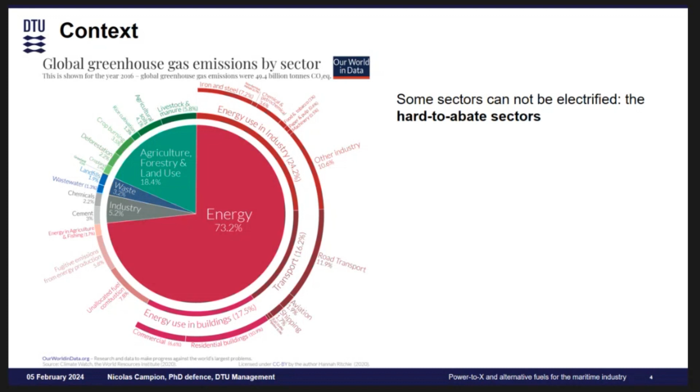So a bit of context: as you may have heard, we have some issues with global warming and climate change caused by greenhouse gas emissions, and the energy sector, as we can see in that graph, is the main emitter. There is a scientific consensus that the cheapest and most efficient way to decarbonize the energy sector is to directly electrify most of it using renewable energy. But some sectors cannot be directly electrified, and those are what we call the hard-to-abate sectors. One of them, which we're going to focus on in this PhD, is the shipping sector.

Shipping is responsible for 3% of global CO2 emissions. You could say it's not so much, but it's still as much as the African continent. And if we do nothing, while the other sectors decarbonize, shipping will keep increasing and may take up to 17% of the share by 2050. Also, shipping is interesting because, as a hard-to-abate sector, all the methods that apply for shipping can be applied to other ones, such as iron and steel, aviation, chemicals, and so on. So basically what we're doing for shipping could, with some adaptation, be replicated for a larger number of sectors.

The IMO, the International Maritime Organization, already proposed some pathways for carbon reductions: one in 2018, not very ambitious, and some in 2023 that are more ambitious. What we'll be looking at in this PhD is the area under the curve. Each scenario is associated with a carbon budget, and then we can see how far it is from what the Paris Agreement would recommend. In this presentation, I will focus mostly on the 1.5 degrees aligned target, which is more ambitious, because 1.5 degrees is clearly defined by the IPCC as a limit that we shouldn't overshoot.

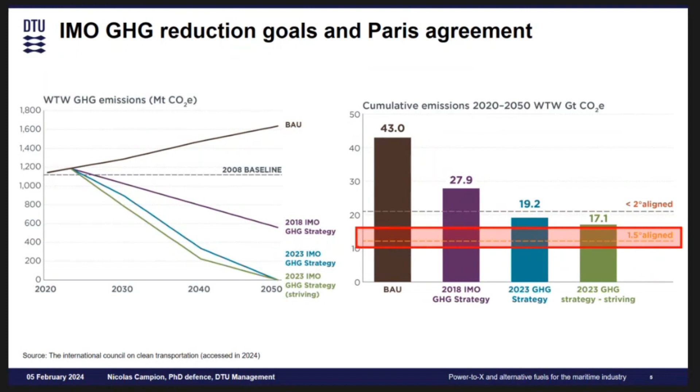And in addition, I've read in Le Monde that if the temperature keeps increasing, the wine production in Champagne will be moved from France to England, and we cannot let this happen.

So the emissions can be reduced through three different things. First, design and operational measures identified by the IMO. But as you can see here, we have a green bar that shows that without anything else, without alternative fuels, we cannot reach net zero. But this raises a lot of questions. When we have to change fuels, which fuel should we use? How much do we need? How do we produce them? At what cost? And is it enough to still stay within the Paris Agreement? So we're going to address all these questions today.

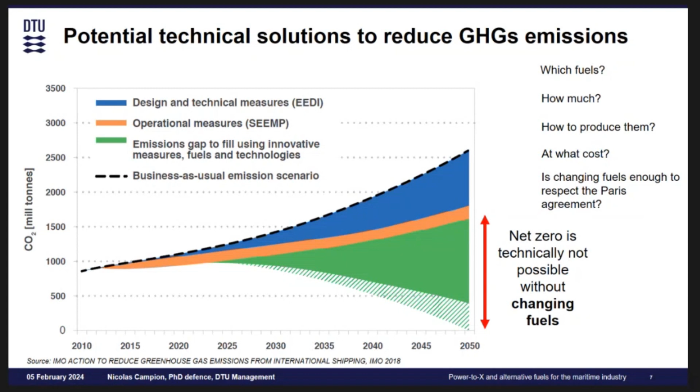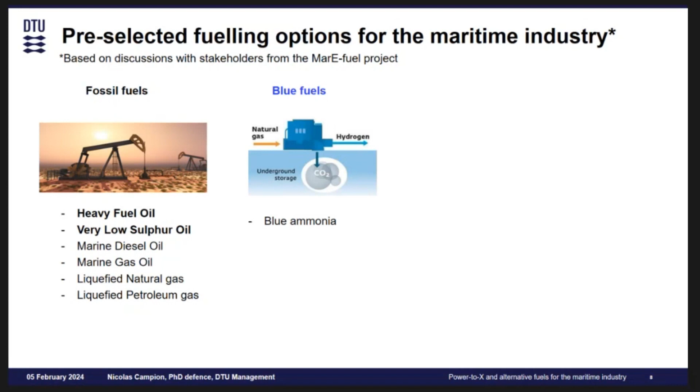So first one, which fuels? Here we're not starting from nowhere. We're looking at literature and discussions with partners from the project that financed my PhD, MarE-fuel. We select the existing fuels, so the fossil fuels, the one mostly used today being heavy fuel oil. We consider blue fuels that are produced similarly to fossil fuels, basically from natural gas, but coupled with systems that capture the CO2 emissions and put them underground forever, in theory. Then biofuels, second generation biofuels, liquefied biogas, for example. And then where most of the focus will be is what we call e-fuels and bio-e-fuels.

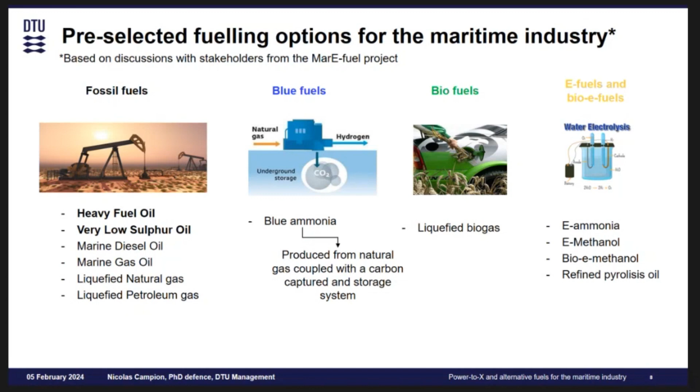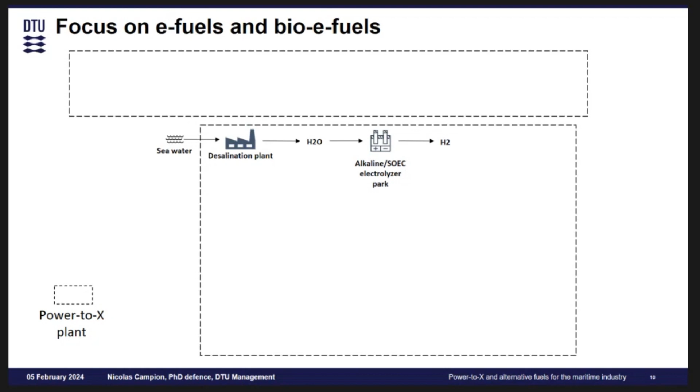These fuels are produced in what we call a power-to-X plant. So it looks like this, and I will go a bit more into detail to explain how we produce these fuels. The main component of the plant is the electrolyzer that will split water into hydrogen. We have different electrolyzer technologies that we've been looking at in this PhD. To split the water into hydrogen, you need electricity that you can source from the grid, but ideally from renewables, to have what we call green or renewable hydrogen. Once you have this hydrogen, you need to transform it into more advanced chemicals that can be used in the ship engines. So you have different ones.

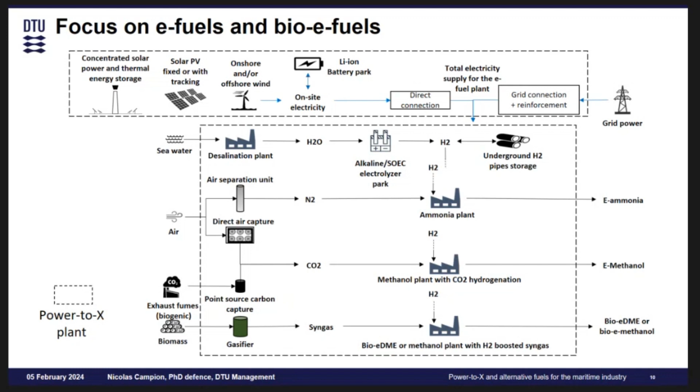The first one we look at is ammonia, which you can obtain by mixing hydrogen and nitrogen from the air. E-methanol, which you can obtain by mixing with CO2. And then finally, bio-e-methanol, which also uses biomass to produce gas that will be boosted through hydrogen. That's why we have the bio in the title. So now that's all the fuels. If you want to improve the operation of your system, you can also, for example, include underground hydrogen storage to take into account the variability of renewable power. Okay, now let's move into the research gap and questions.

So looking at literature about people doing fuel transition pathways for shipping, we can see that it clearly identifies fuel cost and fuel greenhouse gas emissions as the most important criteria for decisions. But usually these two factors are sourced from different sources in the literature and put in the same model. So this means that you will have a non-fair assumption between the different fuels. So when you compare them, it would be important to have something that gets both together with consistent assumptions.

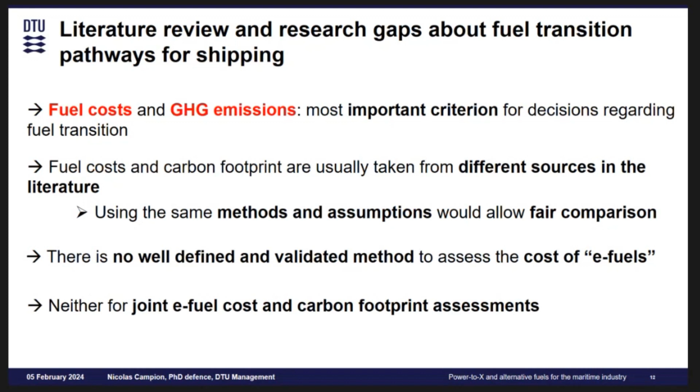In addition, there is no well-defined and validated method to assess the cost of e-fuels, and neither for joint e-fuel cost and carbon footprint assessment. So this led to our research question. So the first one that we will answer through this PhD is: what are the possible fuel transition pathways to align the maritime sector cost effectively with the Paris Agreement?

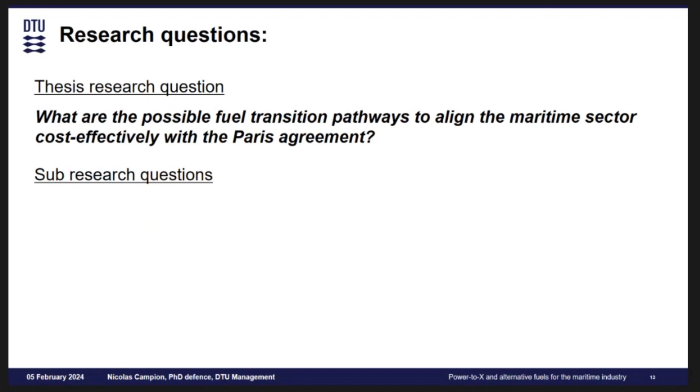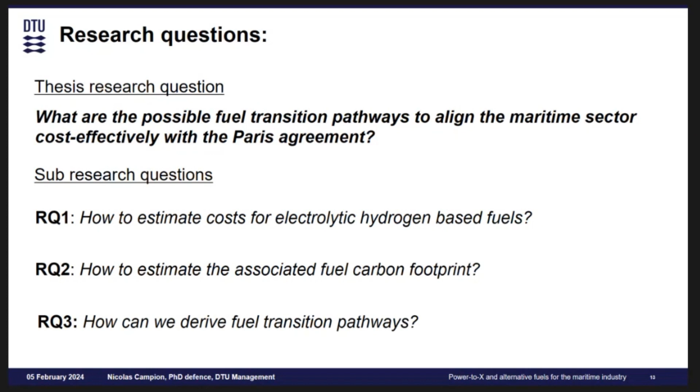And this also led to some sub-research questions, one related to the fuel cost. So how to estimate the cost for electrolytic hydrogen-based fuels? One to the emissions: how to estimate the fuel carbon footprint? And finally, how can we derive fuel transition pathways? Let's move to the method and application to answer these questions.

So our method will be divided in two main parts. So one part is on deriving fuel transition pathways. So the main research question and research question 3 have been addressed in paper number 9 and technical report number 1. And the other part of the method is about finding joint cost and carbon footprint estimates. So here we focus on hydrogen-based fuels.

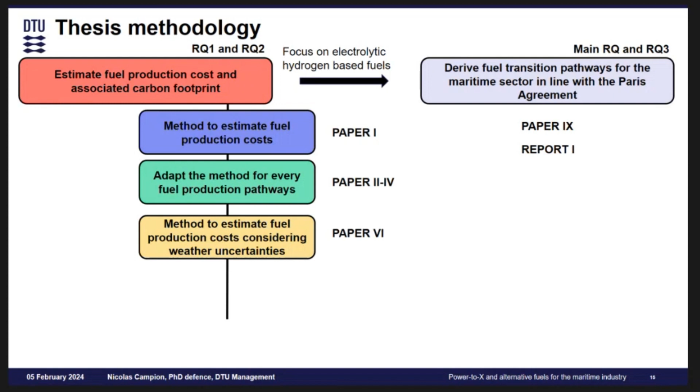So this part of the method is divided in subcategories that have a logical order. So first, we find a method to get the production cost. Then we adapt this method for every possible fuel production pathway. Then we have also an improvement of the method to include weather-related uncertainties. While we develop these two methods, we have, in parallel, developed a method to optimally size what we call a power-to-X plant. Then we have a part about the validation of the method. And finally, one where we get both cost and carbon footprint assessment.

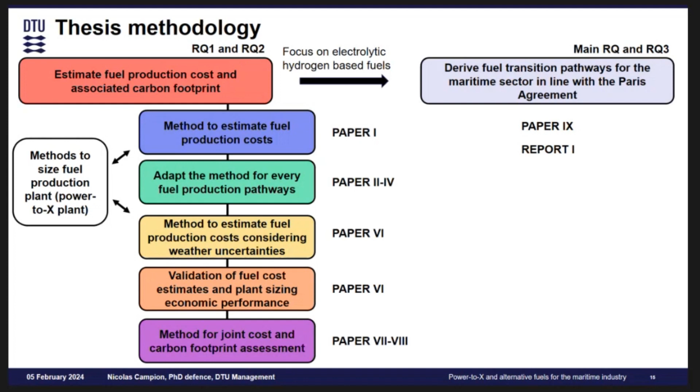So let's move to the first part. So here, I looked at the literature to see how you would traditionally estimate e-fuel cost, back in 2019. One method that you could use for an off-grid system is to basically use the LCOE, capacity factor, system efficiency, and cost to get the fuel production cost. And if you have a grid-connected system, it's more or less similar, but using an average market electricity price or sometimes a renewable LCOE to get the cost.

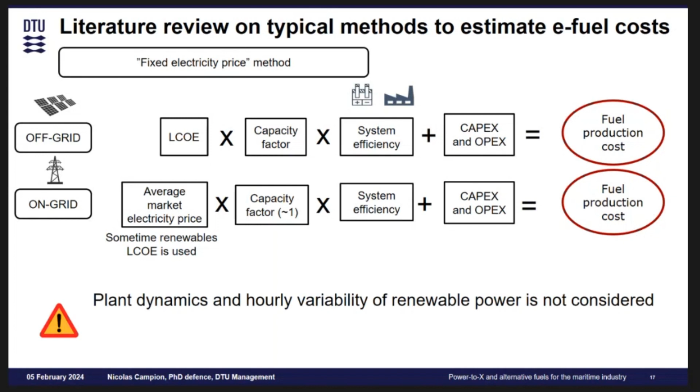What is the problem with these methods? So first of all, the plant dynamics and the hourly variability of renewable power are not considered. Second, in general, you usually only consider one renewable power source, while a combination of different ones, and also the grid, could be relevant. And finally, you don't consider that the electricity price actually varies hour per hour.

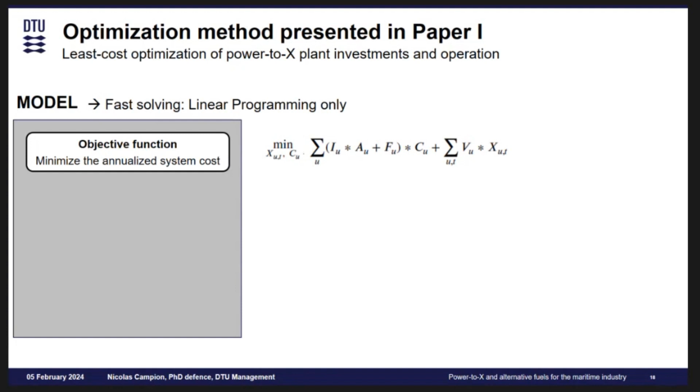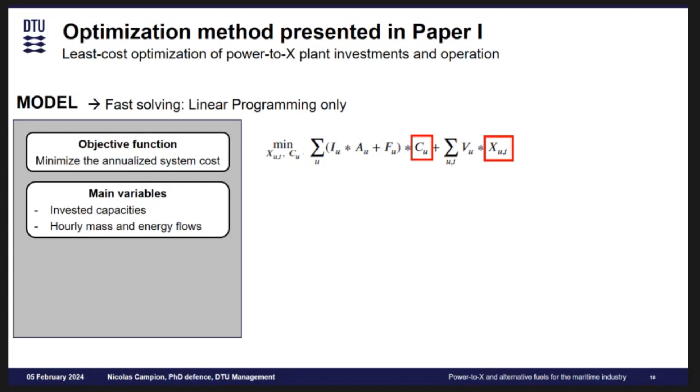So here I came up with the method and the model, which is what we call the linear programming model. It has been kept linear without including binaries to allow fast solving of the model. It has an objective function, which is to minimize the annualized system cost, split in two components, one related to the capacities installed in the system and one related to the operation of the system, like for example, buying electricity. Then we have the main variables that we take decisions on, which are the installed capacities and the hourly mass and energy flows for every component of the Power-to-X plant.

Then the model is constrained, and the main constraint that we have is, first of all, the yearly production target. That's the one that drives the model and forces it to solve. So the plant has to produce a given amount of ammonia per year, or methanol, for example. Then the minimum and maximum load for every unit. And finally, we have some mass balances that represent the chemical reactions of the different components and the behavior of storage systems. And then we have the power balances that take into account the renewable power and balance electrical production and consumption in the system.

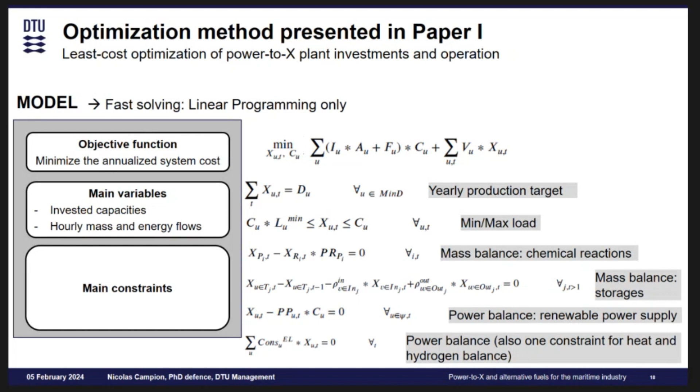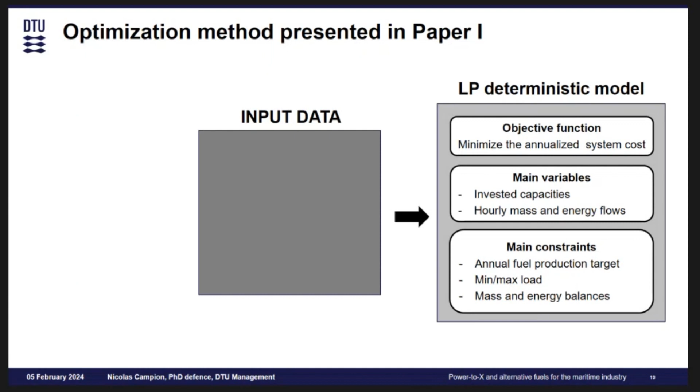So we have the model. Now we need to populate it with some data to get some meaningful results. So the ones we put in are the hourly profile data. So we have hourly power profiles from renewables, from wind and solar, for example, and also hourly grid electricity prices. Other data that we need is what we call the techno-economic data. So basically the CapEx, OpEx, and annuities for every plant component, also the efficiencies and the operational constraints.

So these can, for example, come from a process model, or from the literature in some cases. And here I would like to add that most of the data used in this thesis have been validated by industrial partners through different projects, so they are quite reliable. And once we have this, the type of result we get is the fuel production cost for a given production of ammonia per year, then the optimal system sizing, and then the optimal hourly system operation.

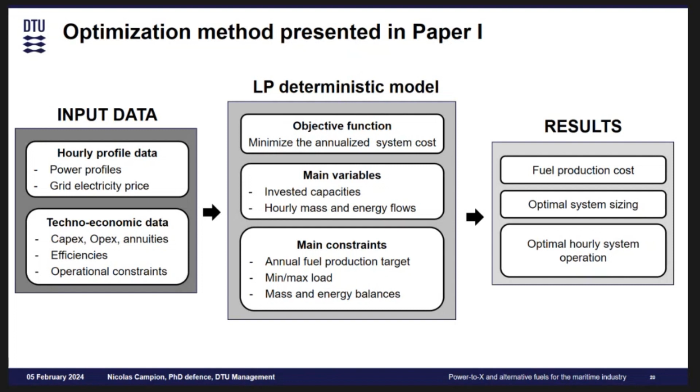So if I summarize, the advantage of this method is fast solving on a desktop computer, so less than 30 seconds. It's adapted to run multiple scenarios for different system configurations. It's scalable, so you can include many different technologies. It's free, from the language to the solver, and it's also documented thanks to David. This means that it can help to have reproducible results, which I think is a useful thing for science.

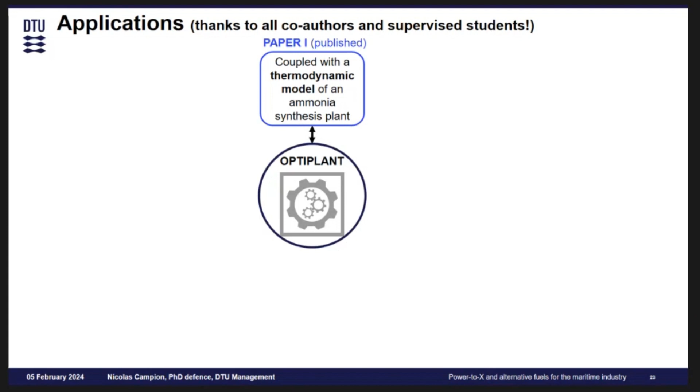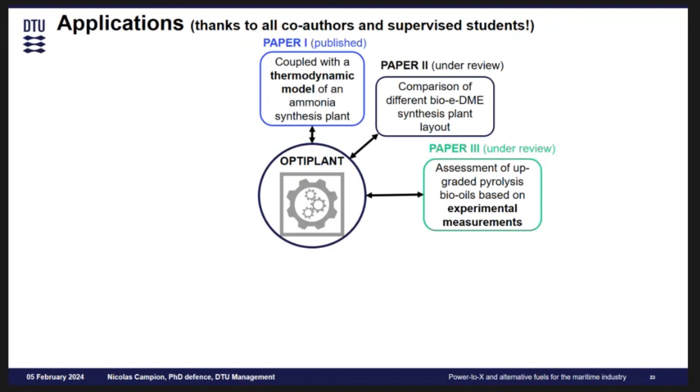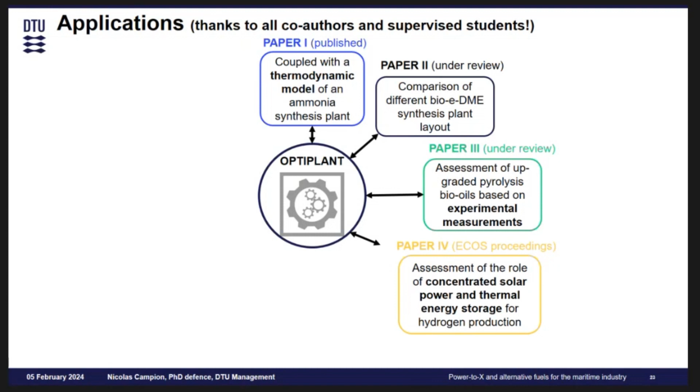And so as a proof, we used this method in very different cases. Here we have the model that can be used, for example, coupled with the ammonia thermodynamic model made by Hossein in paper 1. Also for a bio-e-DME synthesis plant model made by René. Then assessment of bio-oils based on experimental measurements made by Antoine with the help of Moritz and supervision of Lasso. Also, we can study the relevance of concentrated solar power for hydrogen production, which we did with Jose and Raul. It's also been used for different master and bachelor theses and for various projects and technical reports.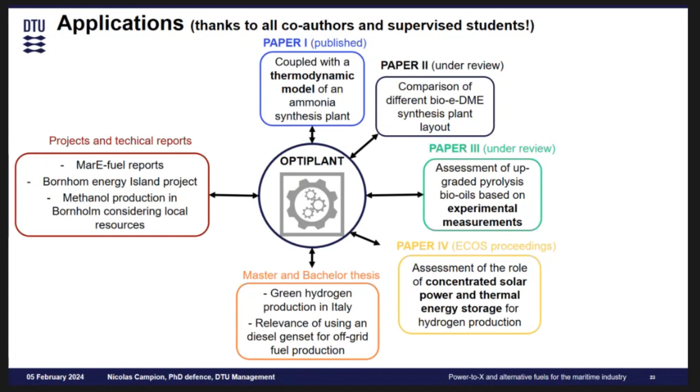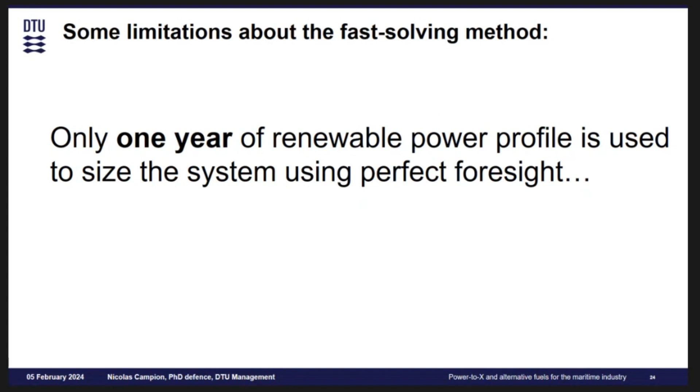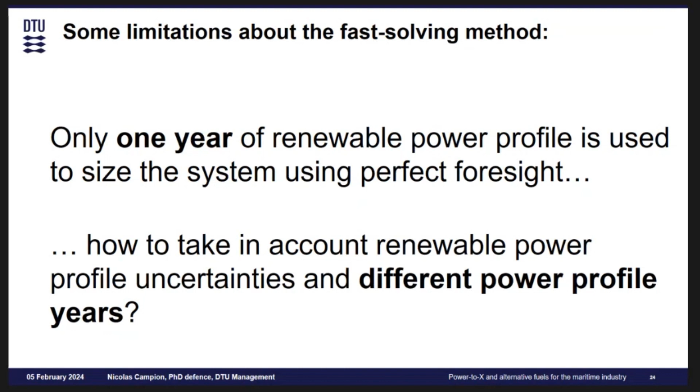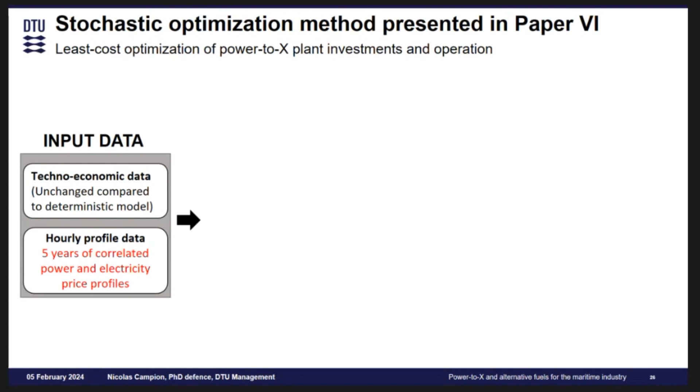Okay, but as good as it sounds, the model is not perfect. One thing that could be improved is there is only 1 year of renewable profiles that we use to get the system sizing and the costs. So how do we take into account the uncertainty related to renewable power profiles and that the weather is not the same every year? So here we move to the first method improvement, which will include uncertainties. We move from the previous model to another one that takes the same input data regarding techno-economics, but instead of taking 1 year of weather profile, uses 5 that are correlated to each other. Why not more? Because if I take more, it won't solve on a desktop computer; it becomes too big.

The core of the model is then what we call the LP two-stage stochastic model. You can see the difference in how the objective function is phrased. Basically it will minimize the system costs, not for 1 year, but for all the scenarios. So you have 2 components: the first stage decisions related to the investment, and then the operation stage decisions that are scenario dependent. The main variables are quite similar to previously. First, the capacities of the system that will be installed, and second, the hourly mass flow. But what changed here is we have an S that was not there before, meaning that the flows are optimized for every scenario.

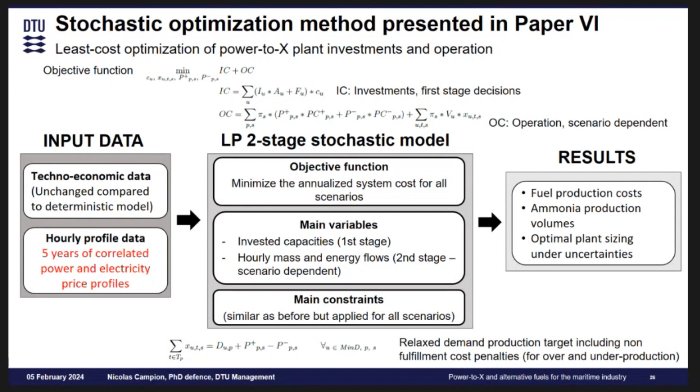Then we have the main constraints. Most of them are pretty similar to the previous model, except that they will be applied for every scenario. We also relaxed the demand production target to leave the model the possibility to overproduce or underproduce in some scenarios. This leads to two more variables, over and under production, that are reported in the objective function as an extra cost. Out of this, you get the fuel production costs, the ammonia production volume for each scenario, but also the optimal plant sizing, considering the uncertainties of your weather profiles.

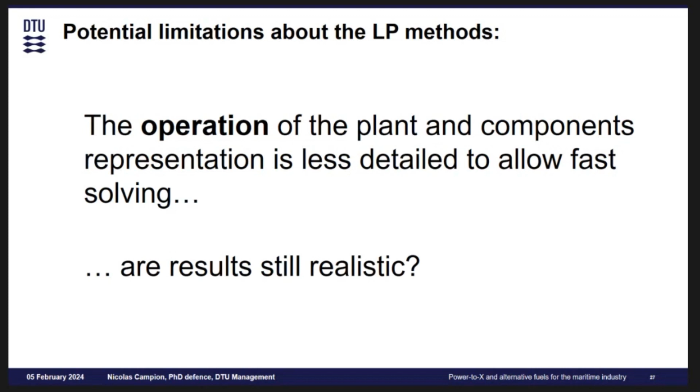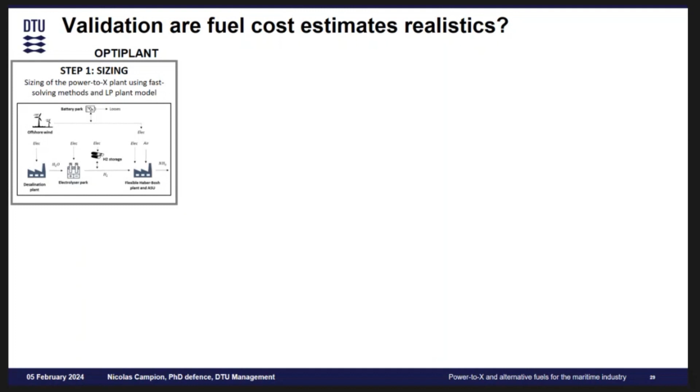Another limitation of the model, as I said before, is that to solve fast, it has to be linear. But by doing so, and by not using binaries, you have an operation that is not so detailed. So the question now is, do we still get realistic results? This is what we look at in paper 6. The method is, in the first part, we take the OptiPlant model that I've been presenting, we solve it, and we get some optimal plant sizing. Here we can use either the deterministic or the two-stage stochastic method. With this plant sizing, we call the plant builder, ask him to build it, and then try it in real conditions.

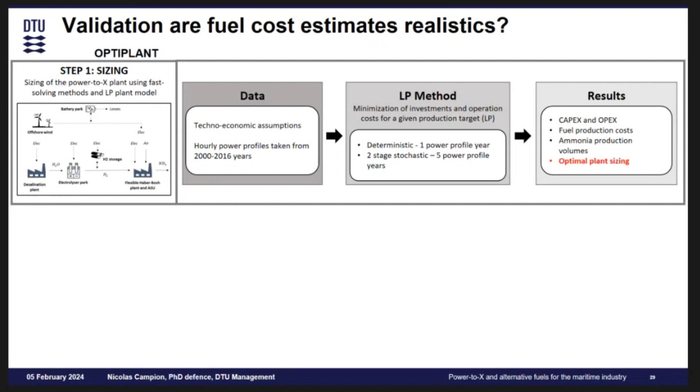Unfortunately, I didn't have any PhD budget left to build a plant. So instead, I used the model from my colleague, Ioannis, that has a better representation of the operation of the plant. It's a MILP model. We give it the sizing from the first model, and then we run the model in real conditions for 5 years. Out of this, we get the actual ammonia production volume after 5 years of operation, and what I call the observed fuel production cost, which we can then compare with the previous one to see if we were off or not.

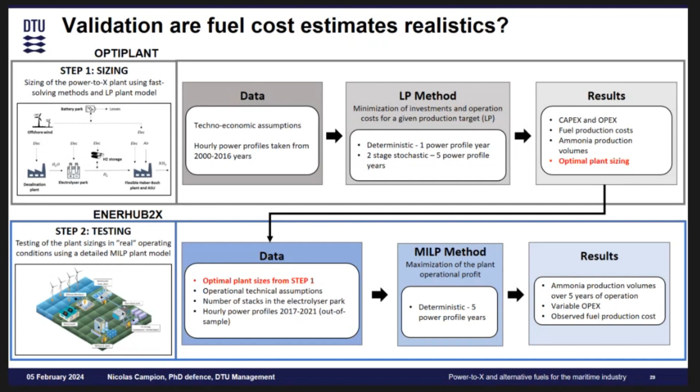Okay, now I presented the method regarding the cost. Now we'll show the one regarding cost and carbon footprint. First of all, I will introduce a few definitions about carbon accounting for shipping.

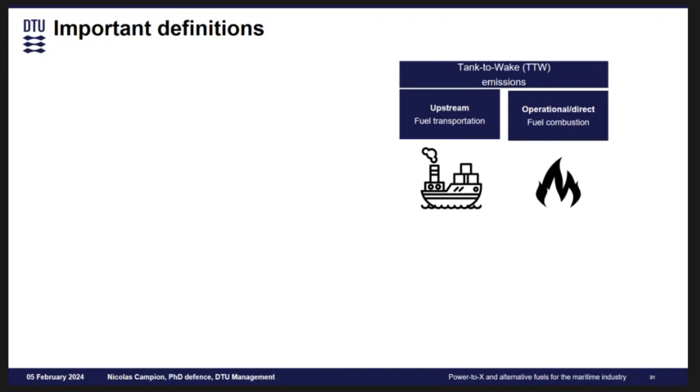So one is the tank-to-wake emissions. So it's the emission you do by burning and transporting the fuel. Then we have the well-to-tank emissions related to when you produce the fuel. So you have when you build the plant to produce the fuel, when you operate the plant, and when you discard the plant. Altogether, this is called the well-to-wake emissions.

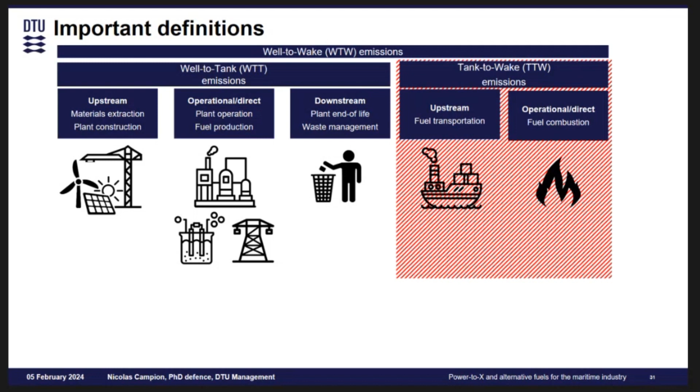In this specific time, I won't look at the tank-to-wake, but mostly at the well-to-tank, as this one will be calculated later on. So I introduce here another notion, which is what we call scope 3 emissions, that will take into account all this, what you see in the red box, and also for the electricity usage, the same. And from this, you would get the emission factor related to building the plant, and also related to using the electricity. If I want to summarize, when you use the scope 3 emission factor, you have to account for when you build the plant. So basically, the renewable electricity is not zero.

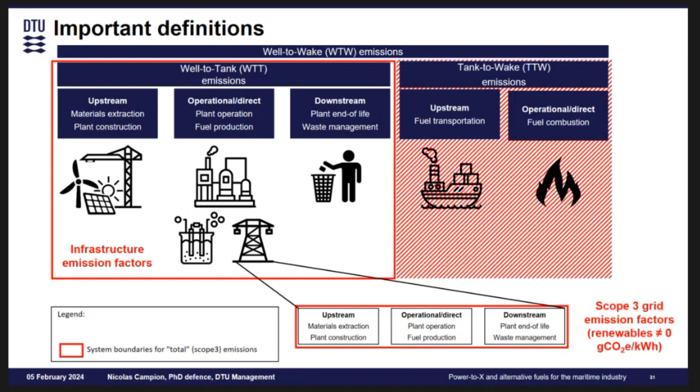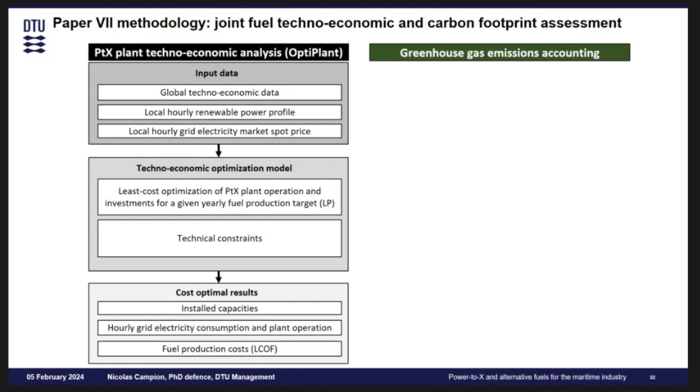Okay, now I take the OptiPlant model, so it's the same as before, and I add the greenhouse gas accounting layer. So this is done post-processing. First, we solve economically, and then we count the emissions. For that, we need the local grid mix and the emission factors for every component of the plant, and also the grid usage. Then, once you have solved the model, you have the installed capacities and hourly grid electricity consumption on an optimal setup. And from this, you can get what we call the scope 3 emissions of the e-fuel production.

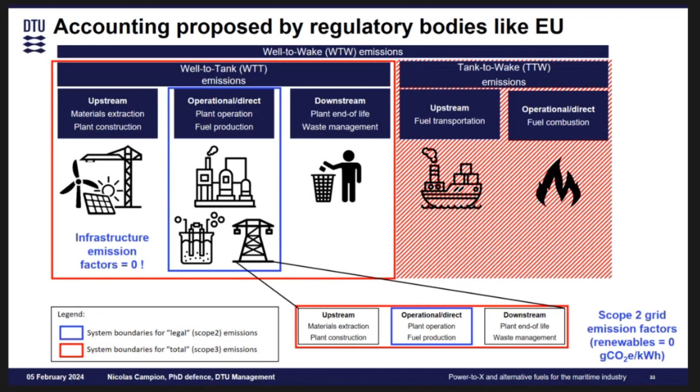So this is great, but it's not the only one. There are other ways of accounting. For example, the EU and most of the regulatory bodies just account for the operational emissions, which means that the emission factor of the infrastructure will be zero, and the scope 2 emissions will be lower for fossil and zero for renewable power. And this has an influence. It has an influence because, first of all, a regulatory body can influence the way you would do investment and plant operation. For example, you would count the emission of the grid and put some restrictions.

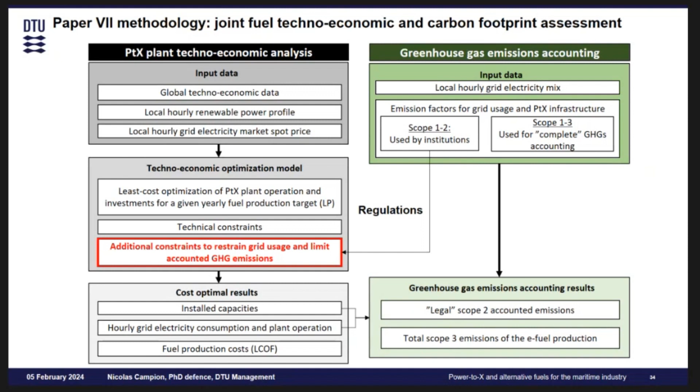So here you take the scope 2 emission factors from the EU accounting method, for example, and you use them to add some regulations that I can also include in the model as additional constraints, for example, to restrain grid usage or limit the accounted greenhouse gas emissions. And then, because we have two ways of accounting, you can get on the one hand the scope 3 emissions of e-fuel production, but also scope 2, which we could call sort of the legal ones.

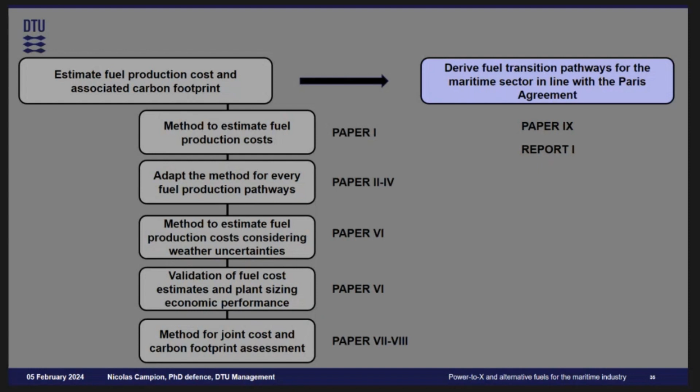Okay, now I move to the next part of the method, regarding the fuel transition pathways themselves. So we have a mixed integer linear model called SeaMaps that has as variables the number of ships that we would buy and decommission every year, the amount of fuel that we use in every ship, and then a ship stock. Then you have a driving constraint, which is the transport demand that has to be fulfilled by the shipping fleet.

Then we have different constraints related to the fuel usage. So you cannot have as much fuel as you want for your ships because they are limited by availability, for example, due to biomass resources or CO2. You will have to respect your carbon budget aligned with 1.5 degrees. And you cannot produce as many new ships or new fuel every year because there will be some ramping constraints.

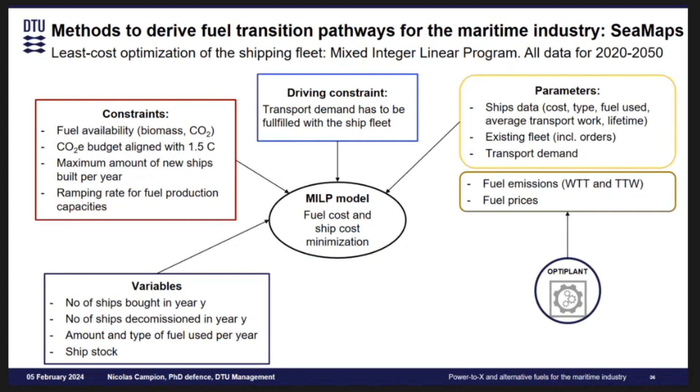Then what feeds into the model are different parameters related to the shipping fleet: cost, the type of fuel that you can use in every engine, lifetime. We also model the existing fleet, including orders, and the transport demand. And very important, also the fuel emissions for every fuel and the fuel prices taken from the OptiPlant models that have been presented.

Now let's move on to some results. So I will organize the results section following the different research questions. So one related to the cost, one to the emissions, and one to the fuel transition pathways. So let's move to the first one.

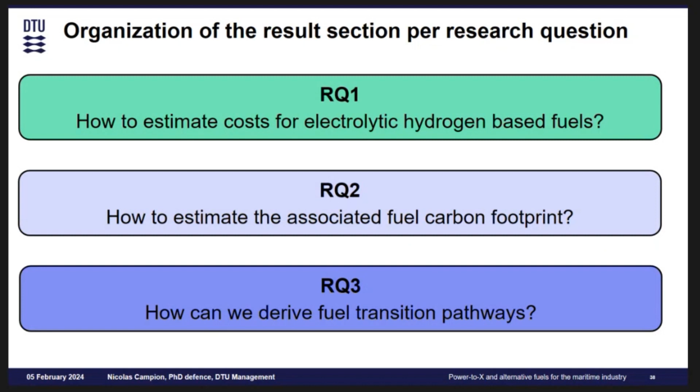So just to explain how we got the results, we've been looking at 3 different sites in the world where you could produce fuels. So one is in the north of Chile, where you have a lot of solar, but not much wind. The other place is a place with a bit more hostile conditions, with no sun but a lot of wind. So this is Denmark. And then the last one is in Australia, where you have both sun and wind.

Then what do you get? So here we have a graph where I show on the dots the fuel production cost, and on the bars, the total annualized cost per category of plant component. So if I take the example of e-methanol, we can see that a large share of the cost will come from using the grid and having some local solar power. Another large share of the cost will come from the electrolyzer park. So here I chose solid oxide electrolysis because it was the cheapest option, and some part for the fuel plant.

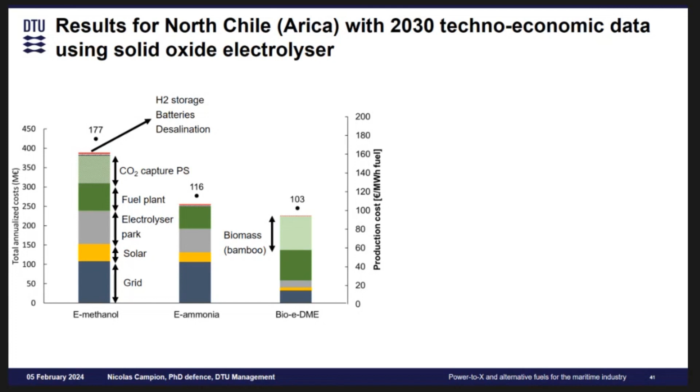Still, if we compare to a traditional fossil fuel, here very low sulfur oil, we have a production cost which is still around 3 times higher than the selling price. So there is something to do if you want to bring them on par. So here I've been showing a system that was grid connected with local renewable power supply. What if you are just off grid? What will happen?

So you remove the grid, but then you have to spend more money on having a larger solar park, larger electrolyzer, and also larger intermediate storage like batteries, so you can keep operating your plant all the time. But in the end, this results in a 9% cost increase using 2030 techno-economic data. In 2020, it would be more around 20%.

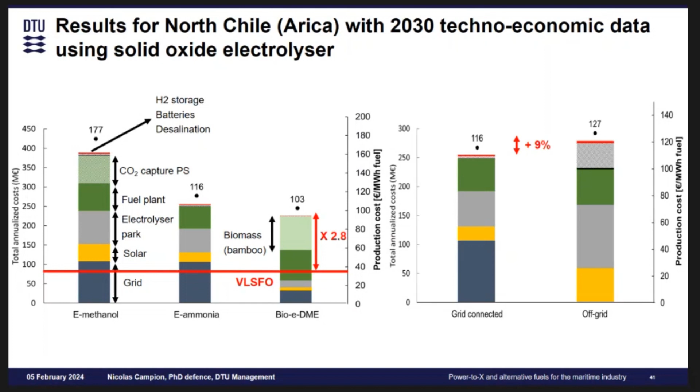Now, if I compare the cost I get to the other method with the fixed electricity price to see how it changes, we can see that first of all, when you're off-grid, we have solutions that give actually much cheaper costs compared to the one just using LCOE and capacity factor, because of the integration between different renewable sources and the use of intermediate storage.

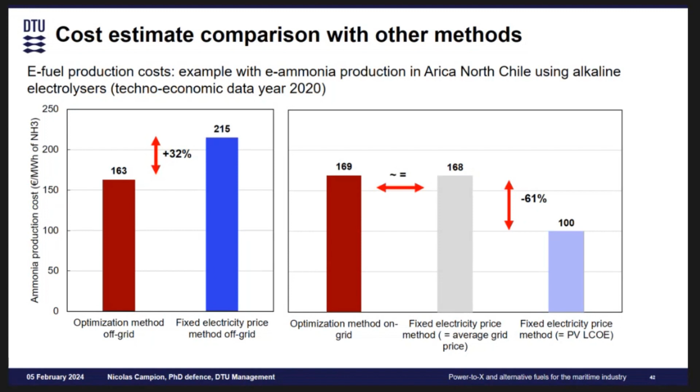For the grid connected option, actually, we found pretty similar results when you use the average grid price instead of the hourly one, because the best way to operate your plant is at full load. And then if you use obviously a low electricity price with a high capacity factor, you will underestimate your cost by a lot.

All right. Another interesting result I got during my external stay at the University of Bologna in Italy is that when you use a reanalysis tool like Renewables Ninja, you will actually significantly underestimate your fuel costs compared to using real solar data. So this is to say that all the costs that I will be presenting and using in the CMAPS model later on will be on the optimistic side.

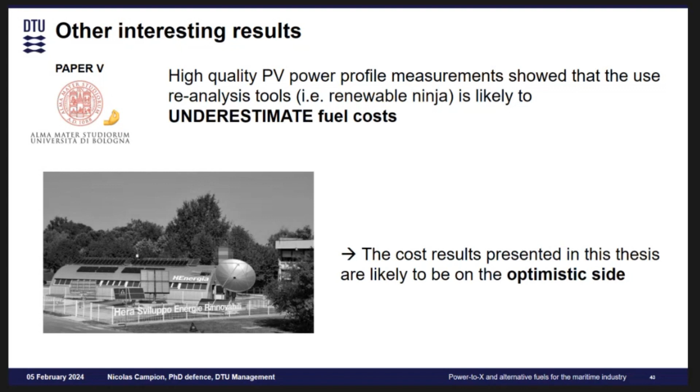Then some conclusions we get from the validation analysis, when we used our more detailed operation model. First, is it fine to actually use one weather year to get the fuel production cost? Well, the answer is yes, as long as the year you choose is an average year, so you avoid extremely low or high capacity factors.

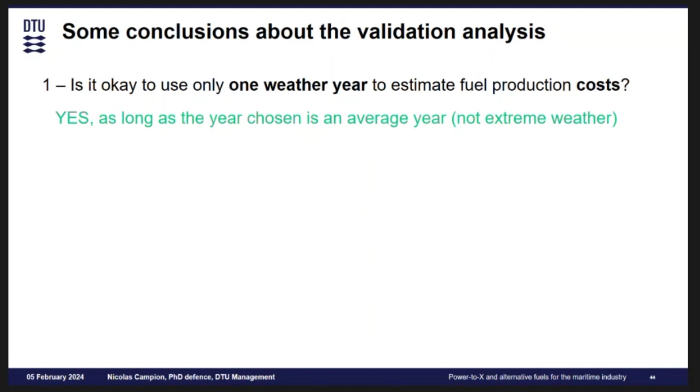Then is it okay to use a linear program formulation instead of MILP, so a less detailed operation model? The answer is yes. And actually, the other parameters, like for example discount rates, will have a way bigger influence on the cost estimate than the operational details, especially when you have hydrogen storage in the plant.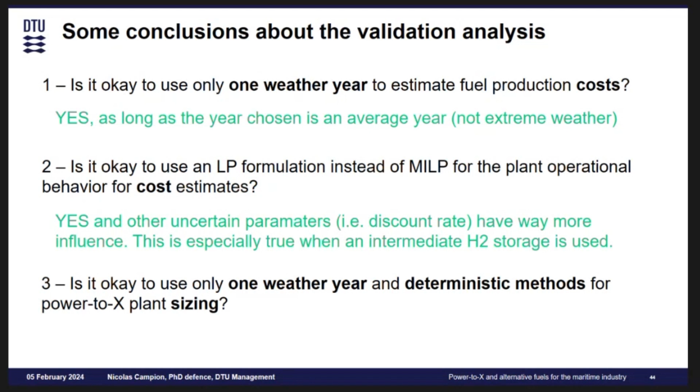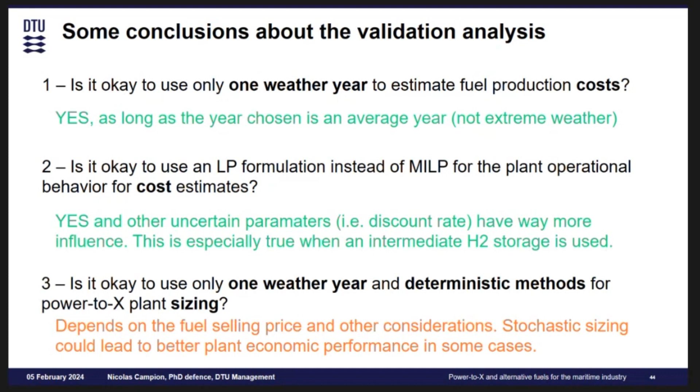And then is it okay to use only one weather year, not for getting cost, but for sizing? Well, the answer is it depends on how much you would manage to sell your ammonia. In some cases, the deterministic method will give better results. In some other cases, the stochastic method will give better results. You can read the papers for more details.

Now the results related to the emissions of the fuels. So here is what we get after running the model and applying the method I showed previously for different fuels in 2030 in Arica, which is a nice place to produce fuel. There's a lot of sun. On the bar, you can see the emissions in kilograms of CO2 per gigajoule of fuel. Most of the emissions come from using the grid, and a little bit comes from building the solar plant.

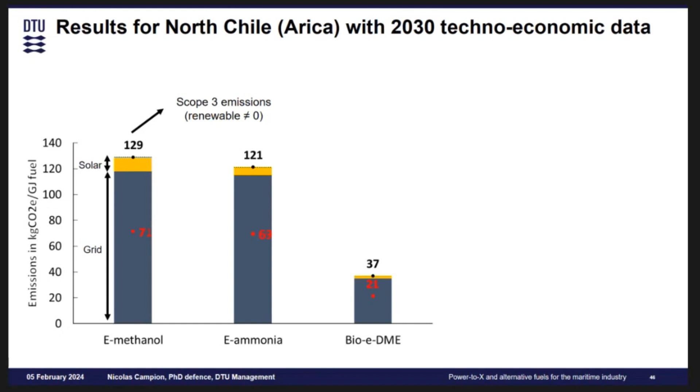Okay, what do these numbers mean? In black is the scope 3 emissions, which takes into account building the plant. And in red is scope 2, where you don't account for building the plants, so you have lower emissions. And then how does it compare to fossil fuels? Well, if you take LPG, which is one of the fossil fuels with the lowest CO2 emissions, it's above.

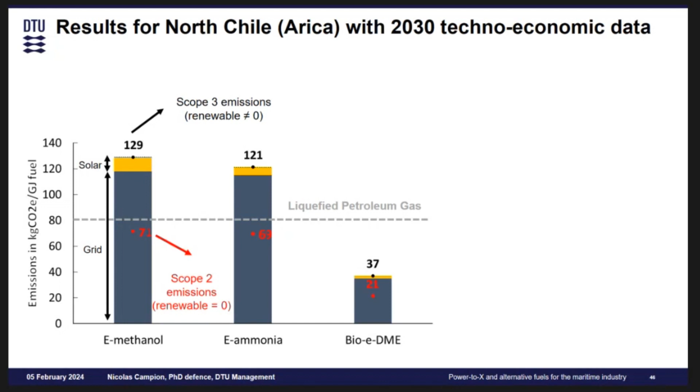So basically you produce a fuel which is 3 times more expensive but produces more emissions if you use the grid, except in the case of bio e-fuels, because the biomass counts as zero emissions. This is because in Chile we still have a lot of electricity coming from fossil sources. So if the system doesn't change, it's a bad idea to use grid electricity. And because it's a bad idea, we have to do something. What we can do is implement regulation to restrain grid usage, like the EU is proposing, or others.

Here I've been looking at different ideas before the regulation from the EU. One of them is, for example, putting a maximum cap on the emissions you can emit per year. If you implement a yearly emission threshold of 36 grams of CO2 per kilowatt hour, why this value? Because it's the one proposed by a certification organism called CertifHy. Here you would get, when you account for scope 2 emissions, indeed 36, but when you account for everything, you go to 70, which is actually close to the emissions of LPG. Here we account for scope 3 for LPG also.

Then, for example, you could use a CO2 tax on the electricity. In Chile, we could see that a 100 euro tax would work pretty well in reducing the emissions. Another option is to limit access to the grid, for example limited to the power unit for the ammonia plant. Here, also a good reduction. And finally, going completely off grid, which is by far the best solution, even accounting for building the plant. The cost will increase by going off grid for the reasons explained before, but not so much compared to using the grid. So there's something to do here.

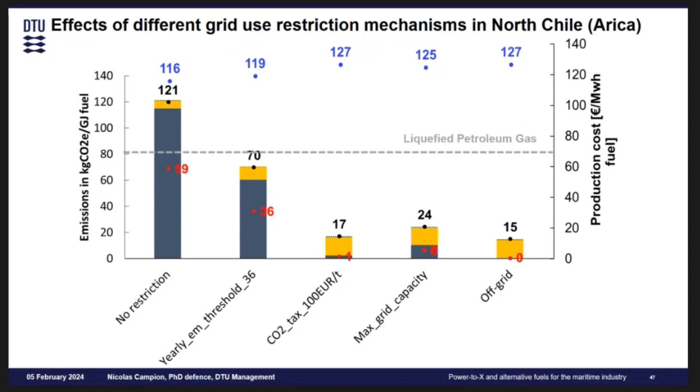Later in the model, I will use the emissions only from the off-grid fuels and also from the ones without restrictions to compare. Now, let's see what fuel transition pathway we get. I will explain the figure in more detail, but this is the fuel production pathway we get in a world where we don't have much biomass available for shipping, because maybe it's used by the competition or there is not so much sustainable biomass. And the fuels are produced off-grid, so in a clean way, but a little more expensive. In this case, first of all, the yearly CO2 emissions decrease to close to zero around 2045, not following, for example, the IMO targets, but in total the area under the curve still respects the Paris Agreement objective.

So what are these red bars here? Basically, this means that the model did not solve with the fuel options it has and the ramping constraint. So the only way to stay within 1.5 degrees is to reduce fuel consumption now, while we don't have clean fuels, and the reduction is about 16% of current fuel consumption. The reduction has to be sustained from 2026 until 2036, until the green fuels come at scale. Then as a transition fuel, you would rather use, for example, LPG rather than heavy fuel oil to limit emissions while we still don't have clean fuel available.

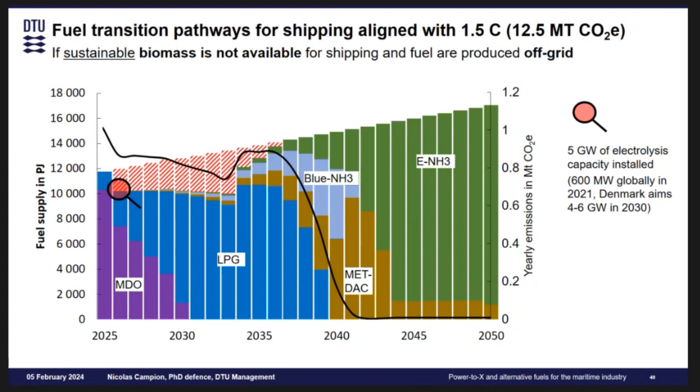Then if I zoom in, there is something here: the amount of electrolysis capacity we have to invest in to start the ramping, and this is 5 gigawatts. So what is 5 gigawatts? It's actually a lot, because there were 600 megawatts globally installed in 2021. So we have to start now and at scale. For example, Denmark aims to install 6 gigawatts, which is nice, but it's in 2030. If it's in 2026, it's even better.

Then if I look at other scenarios, for example, one where the fuels are produced using grid electricity. So we don't control how we produce them. We use the cheapest way, we use the grid as it is today, and we wait for it to be decarbonized over time. So here it's even harder for the model to solve, which shows that we have a bigger fuel consumption reduction needed in the short term.

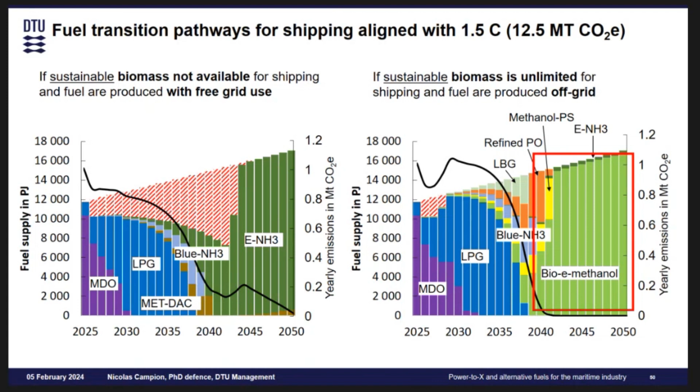And then in another world, when we have unlimited supply of biomass, you would rather favor biomass-based fuels like biomethanol, LBG, and refined PO in the beginning, because they are cheaper and on paper with less emissions. Here, I emphasize that it has to be residual sustainable biomass, and that if we cut down more forest, it's not going to work.

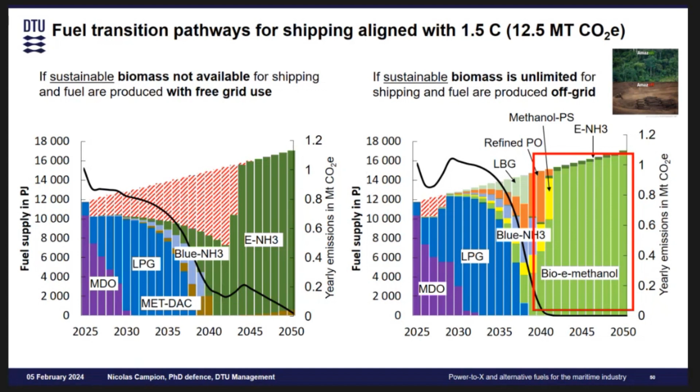Then how we can enforce all these things, because they won't magically happen. One way is a market-based measure to reduce the cost gap between green fuels and fossil fuels. And if we want to use a CO2 tax to bring this gap closer, you would need a tax, for example, that would go from 50 euros now to 850 euros in 2050. So it's quite a big increase. On top of this, it has to also be combined with fuel consumption reduction. Otherwise, the model doesn't stay below the 1.5 degree carbon budget.

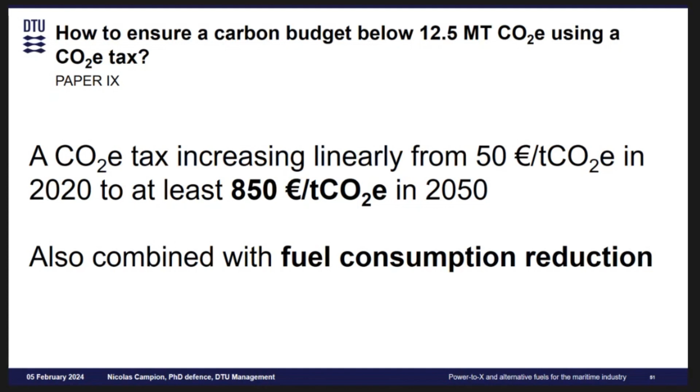Now a bit of conclusions based on the whole analysis. So first of all, let's answer the main research question and give some recommendations. So first of all, which fuel should we use then? The answer is all the fuels should be used in the short term, because we don't have the time and there's a lot of fuel that is used by shipping, and most likely ammonia in the long term if there is no sustainable biomass available at scale. Then it will be relevant to study a bit more the role of LPG and other fossil fuels that have lower emissions than heavy fuel oil as transition fuels.

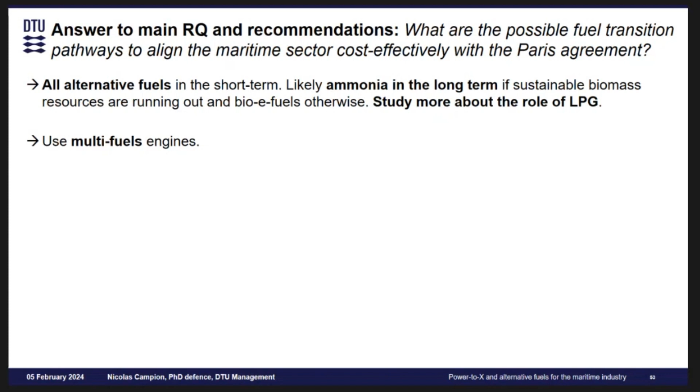Then the fleet should be equipped with multi-fuel engines that can switch between all the different fuels. The investments are made now, but they will be useful in the future. It's important to restrain and monitor carefully the grid usage for e-fuel production until the grid is fully decarbonized. Then from 2026, we have to install 5 gigawatts of electrolysis capacity and increase this amount by 50% every year. So that's the same growth rate as PV.

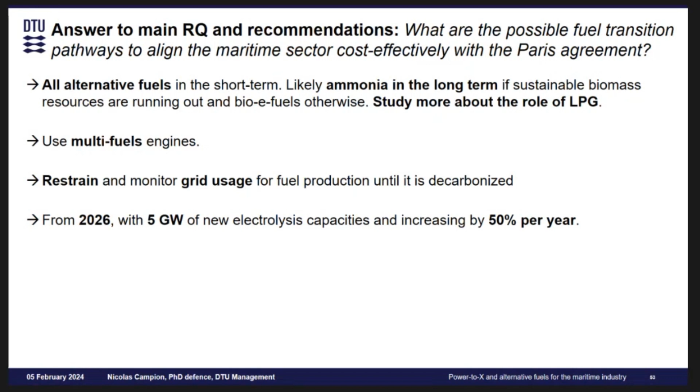And then just to give an idea of the size, if in 2050 we have to cover all the demand with e-fuels produced by solar in Chile, we have to use 2.4 times what is installed worldwide in PV today. And that represents covering Denmark with solar panels. Don't know that it's a good idea.

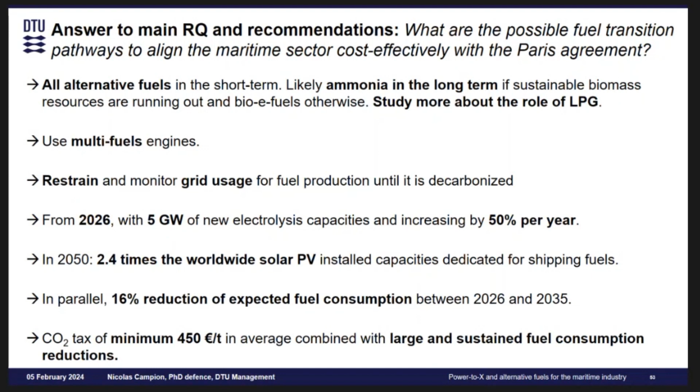Then in parallel, you have to combine this with a 16% reduction of expected fuel consumption in the early years while the fuels are not available, so between 2026 and 2035, more or less. And if you want to trigger this change through cost measures, you have to implement a CO2 tax of minimum 450 euros per ton on average, together with sustained and large fuel consumption reduction.

So here's a bit of the scientific contribution of this PhD: new methods to get the fuel cost and the carbon footprint assessment, a method to get fuel transition pathways in line with the Paris Agreement, and then some open access models and some papers and reports.

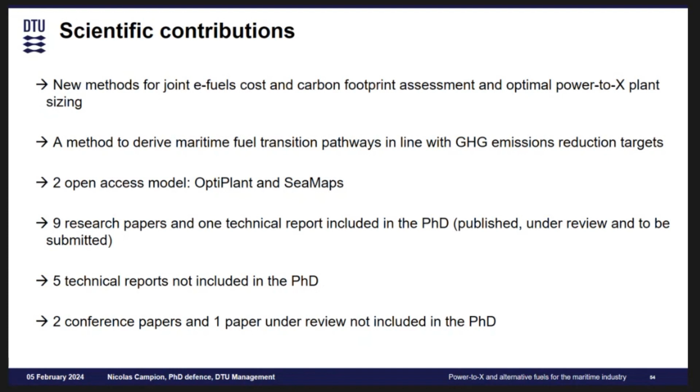Finally, some perspectives on what science could do to improve this type of study. So first, what I would personally like to do is to improve the interface and usability of the tool so it can be used by others than only researchers, and have impact on society and improve the reproducibility of results and validation. Then one thing that would be nice is to actually validate the cost and carbon footprint estimates on a real power-to-X plant.

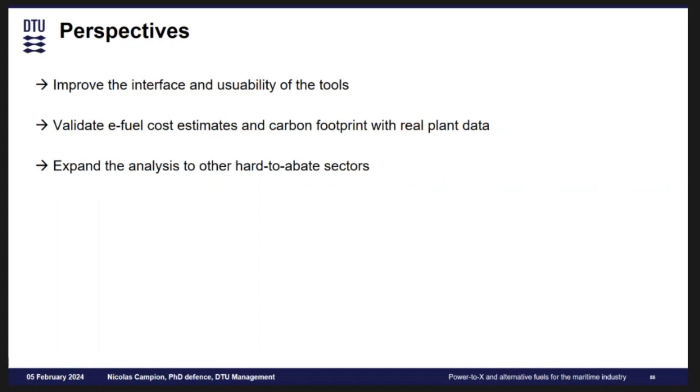And then we could expand the analysis to other hard-to-abate sectors, so not only focusing on shipping, but also aviation, chemicals, and so on. And one thing that could be interesting to look at is that we've only been looking at CO2, but there's a lot of other things that we don't want to damage, like land use. Do we have enough materials to produce all these green fuels, solar PV, wind turbines, batteries, and so on? And can it affect biodiversity, to have all these very large plants all over the world?

And then finally, what would be nice is to see if this would apply in real life. So that's what we can start doing, because we are late already.